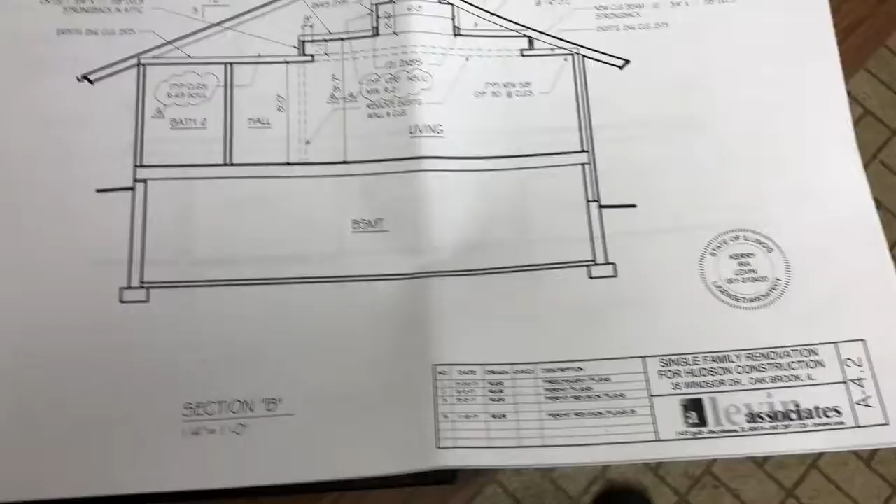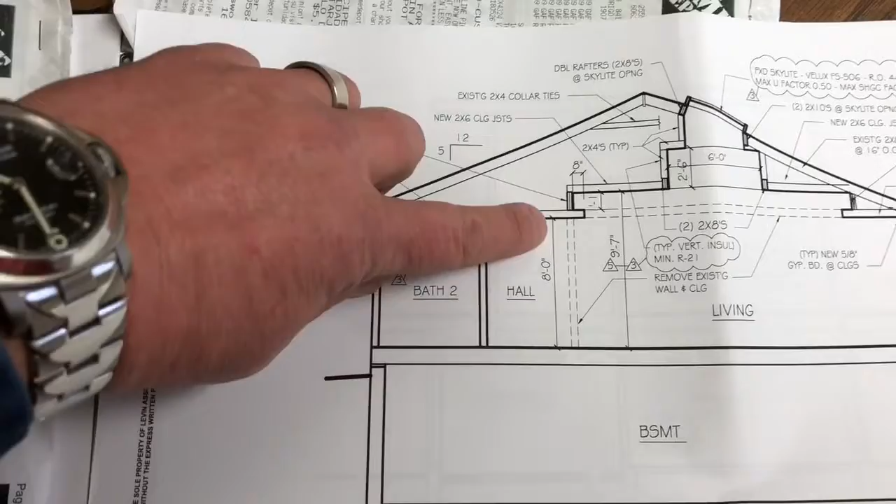35 Windsor, framing this living room skylight. We have a call for either 14-inch LVLs or 3 11 7/8. They are going to be sitting above the ceiling joist, and this little shelf was going to be created by the existing ceiling joist. This dotted line is the removal of that existing hallway wall, if we remember,

and this weight is supposed to be carried to this point here. When these flush come and they are to terminate into this location, which would be them coming here, we simply can't achieve that. And that bearing point would have to be located here, which is not something that the client wants.

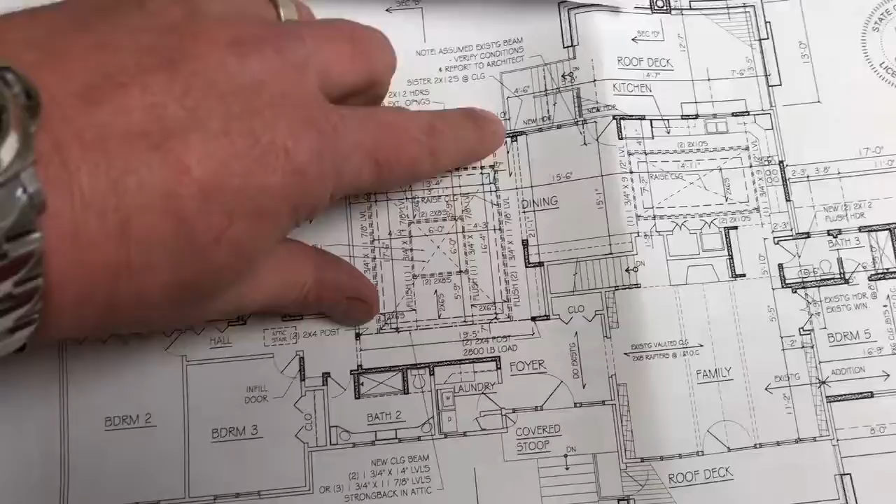That would have to come out all the way, and this would interrupt this flow of the room, because we would have a situation similar to this one. So this opening would get really small. That is not desirable. So what we're gonna do, instead of having these LVLs be above these joists, we're gonna drop them down. This will allow us to pocket in nicely here.

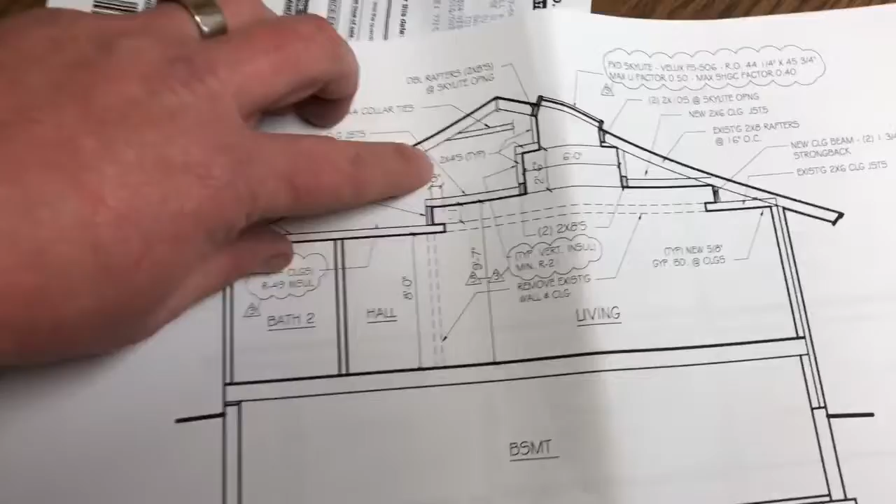All of these are gonna then drop by those 6 inches, and then this leg is going to get extended that 6 inches. So what we have to drop here, this is gonna get bigger. So let me show you. So that's going to be our bearing point for the LVLs that are going to be in this line, right? But instead of them being above the joist, they're going to be in place, so we can remove this. That is going to be carried to this location.

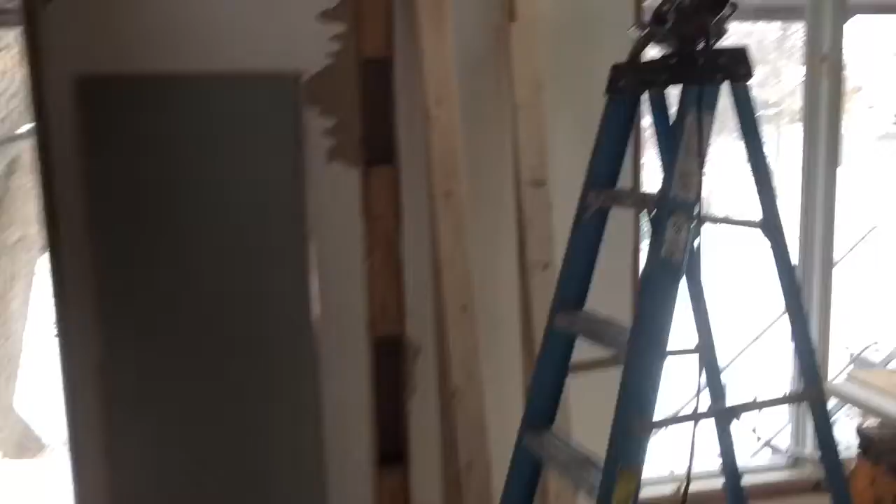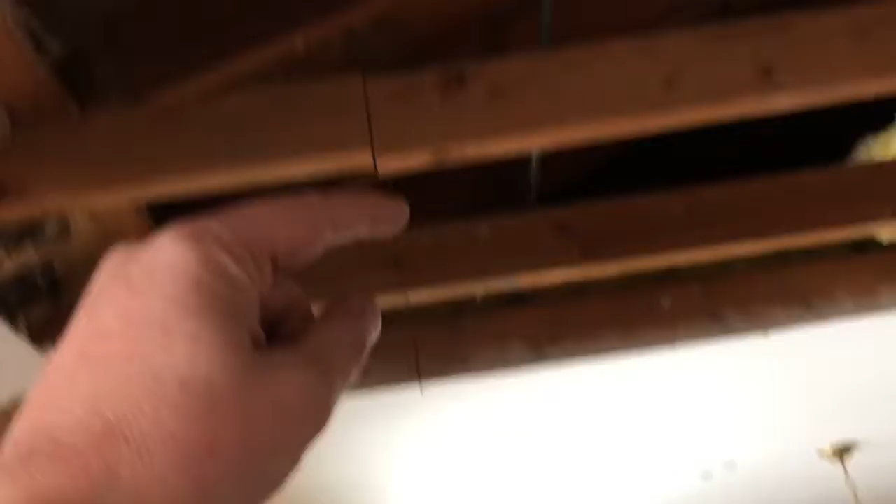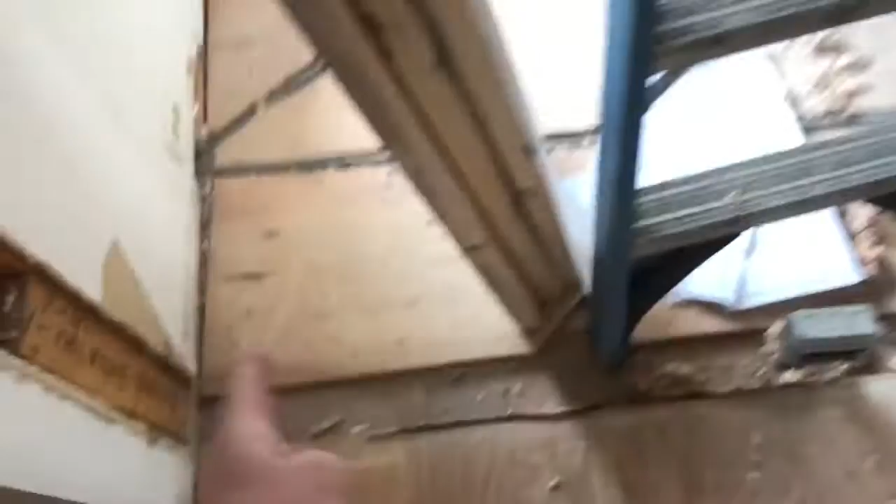And then as we travel north, if we were going to have them above, this space is what we would require. That would then take this wall all the way out to here, which is not acceptable. So by dropping it down, we're really going to be able to tuck it in nicely. We're still going to have a little something here in order to carry it, but it's going to be minimal instead of this long wall that would require us to carry the weight here.

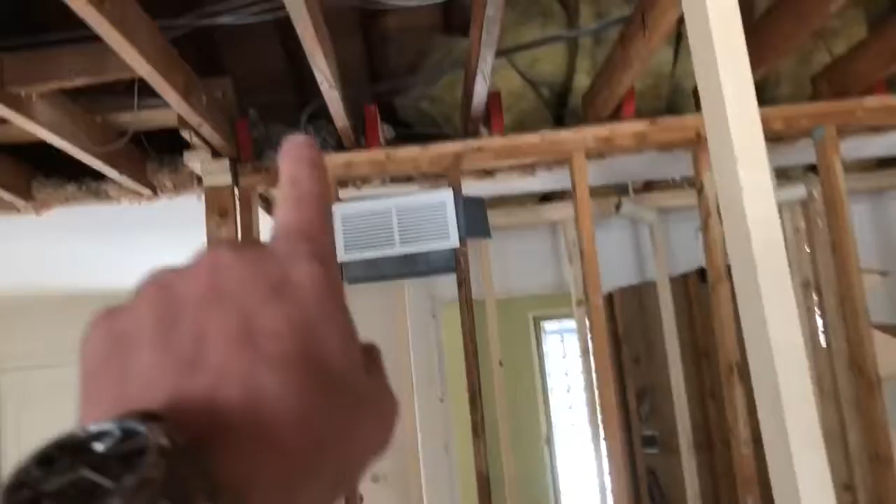The other reason we have to do that is that we assume that these joists run all the way across, and they all are joined on this bearing wall. So that's another issue. So when we take these out, this LVL is going to come in here. We'll be able to header off on that side.